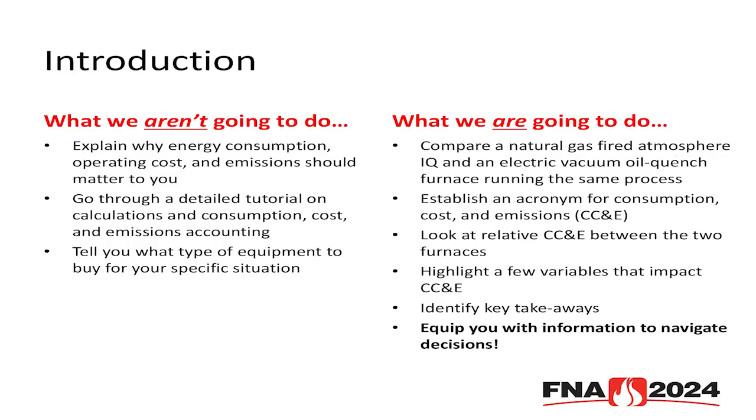So what are we going to do? We're going to go through a case study comparison between a natural gas-fired IQ furnace and an electric vacuum oil quench, running the same workload, the same process, and we'll be going over their results for energy and utility consumption, the operating costs for that cycle for each piece of equipment, and the carbon emissions.

We'll also look at just a couple variables that can change those results. There's a lot of variables that can have an impact, but we'll highlight a couple, and then we'll summarize takeaways at the end. So our objective here is to equip you with information and gain some familiarity on the data behind what's actually going on in this comparison.

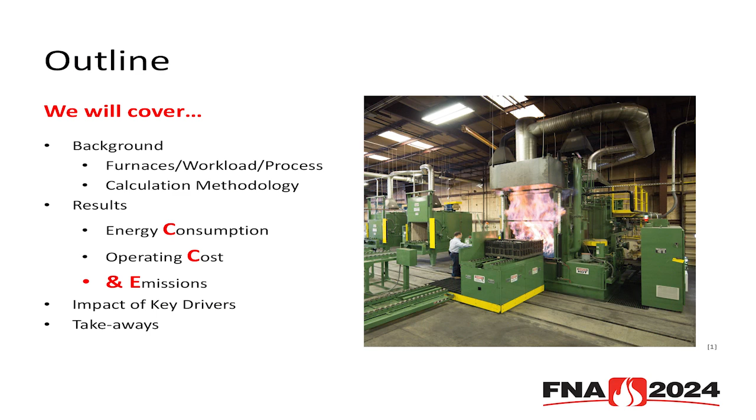So we'll run through a background, going over the equipment, the workload, the process, a brief overview of the calculation methodology behind it, go through the results for energy consumption, operating cost, and carbon emissions. We'll talk about some of the key drivers and summarize the takeaways.

The Atmosphere IQ uses indirect fired recuperated burners for its heat source, while the vacuum uses SCR fired electric heating elements. So that's one of the main key differences.

Another important distinction is that the Atmosphere furnace has 12 inches of ceramic insulation, whereas the vacuum furnace just has 2 inches of graphite felt. That's pretty typical for the difference between vacuum and atmosphere equipment, just because less insulation is used to preserve the quality of the atmosphere and maintain a good pump down time. But we'll see how that difference plays into the results significantly.

One other difference is the way each furnace produces its atmosphere. The IQ on the left uses endothermic gas for its protective processing environment, measured at 750 CFH, whereas the vacuum furnace uses pumps to remove the atmosphere, in this case a roughing pump and a booster pump. So two different methods of accomplishing the same thing, but again, one of the key distinctions that'll show up and make a difference in the comparison.

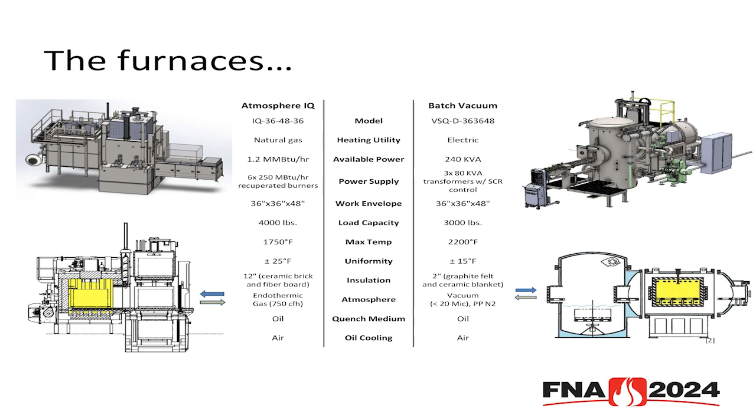There are a couple other minor differences, like the total workload capacity and max operating temp between the two furnaces. But because we're looking at the same workload in each, operating the same thermal cycle and same temperatures, that's going to come out in the wash since we're running them the same way and using the same capacity.

Speaking of the workload, we'll be looking at a basic neutral hardening process. The workload will be 2,500 pounds of 4140 steel, with an hour 45-minute ramp rate, corresponding to about 15 degrees a minute, a really typical ramp rate, going up to 1550 and holding for 2 hours, followed by an oil quench.

We picked this cycle just to have a very clean baseline for comparison. Obviously there could be a lot of different permutations for the thermal profile with different preheat temperatures, soak times, ramp rates, et cetera, but we wanted to go with something middle of the road to get an idea of how they stack up.

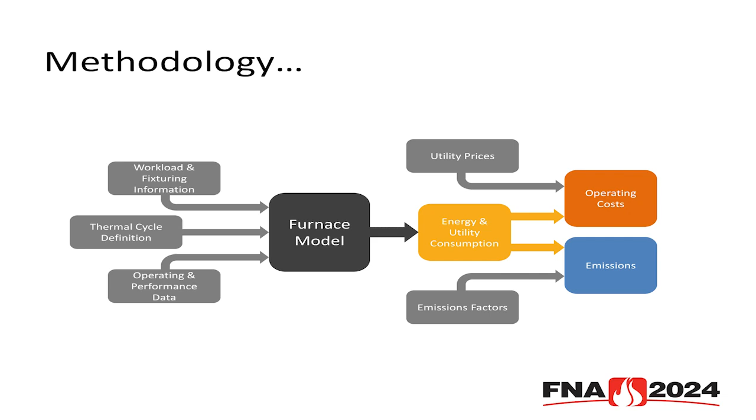Things like power consumption for pumps, et cetera. We're feeding all that into a furnace model to come up with the energy and utility consumption for this particular cycle. Once we have that energy consumption, we're taking utility prices and combining it with that to come up with the operating cost for the cycle. And on the bottom, we're taking emissions factors and adding them into the energy values to come up with the equivalent carbon emissions.

I know I said we're not going to get too far into the weeds, but I did want to go through some basic carbon accounting terminology for anyone who's not as familiar with that. There's a pretty common misconception that eliminating on-site combustion and moving toward electrification can just eliminate carbon emissions in general. That might be the case if you're contracting specifically for renewable energy, but in most cases you're required to account for all the emissions associated with your process.

That covers things like the direct emissions from burning fossil fuels on site, which fall under Scope 1. It also covers any emissions generated as part of generating the electricity you consume on site, so fossil fuel fired power plants also fall under that, and that would be under Scope 2. And it covers anything associated with the delivery of products used in your process, which fall under Scope 3.

An example of that would be delivering finished goods or delivery of nitrogen if you have compressed gas or liquid nitrogen -- so just delivery costs, and that's going to vary some depending on your location.

So the nice thing about that is we can take emissions factors and use them to translate those different utility consumption values directly to equivalent CO2 for a comparison. Some of those values are fairly fixed, like the amount of CO2 that's generated when you burn a fixed amount of fossil fuels in a burner. That's a pretty fixed value, but some of them will change, like I mentioned, the nitrogen.

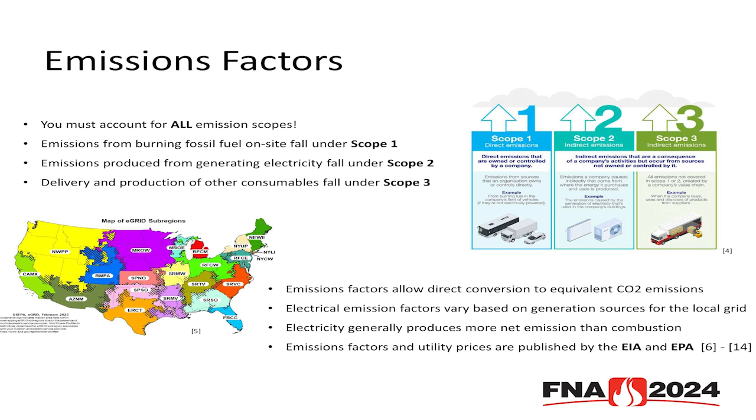Depending on your nitrogen infrastructure, you could have, if you're delivering compressed gas versus delivering cryogenic liquid or generating on-site, depending on your storage capabilities, distance to suppliers, all those things can have an impact on what the emissions factor would be for that. So there's some variation there, and very importantly, the electric emission factors can change as well, depending on the sources for generation for that region of the grid. But those emissions factors and utility prices are published by the EIA and the EPA, which gives us a nice baseline to reference published data for what those can end up being.

So we'll dive right into the results. Simple slide, a lot of work going in behind it. But this is kind of an overview, and there's a couple important observations that we'll unpack right out the gate. So the first thing we see is that the atmosphere IQ is consuming about 2,300 MBTU of energy for the cycle, whereas the vacuum furnace is right around 1,500. So that's about a 60% increase in energy consumption for the IQ furnace, which is big. And the next couple slides will dive into more of why that is.

But despite consuming substantially less energy, the vacuum furnace at $35 a cycle is around twice as expensive to operate as the IQ at $17. So that's primarily due to the fact that electricity is just a more expensive energy source for firing the furnace. So despite that difference in consumption, the vacuum furnace ends up being more expensive to operate.

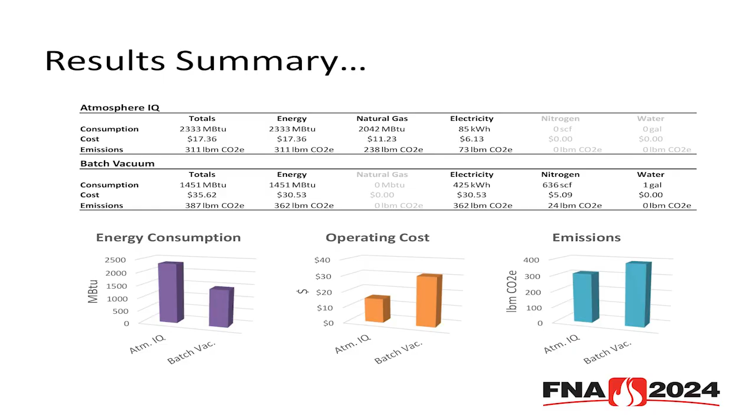And there's a similar story with emissions, where the emissions factors for electricity tend to be higher as a result of all the inefficiencies along the supply chain of delivering that, because again, unless it's renewable to start with, you're generating it, transmitting it, and for thermal processes, in the end, that tends to have a higher carbon impact than just burning those fossil fuels directly on site.

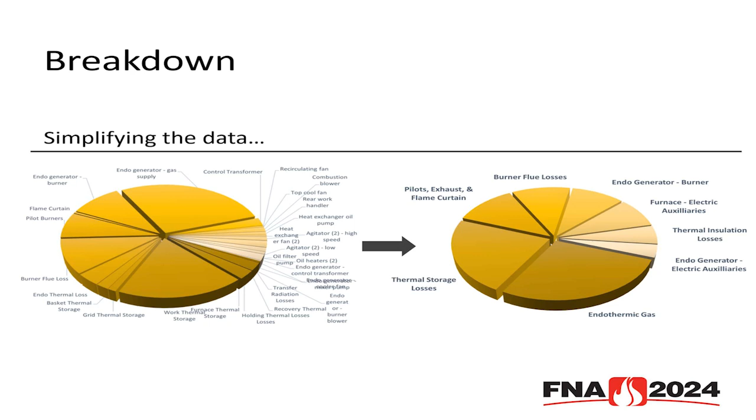So I threw this slide in just to give an idea of all the pieces that are coming into these models. It's a little bit overwhelming with all the lines there. So what we wanted to do was distill this down, make it a little bit easier to process, simplify the data. So we took different things and distilled them down into categories, so you can see things like the thermal storage for the baskets, grid, work, and the furnace are all combined into just one piece for total thermal storage, just to simplify what we're looking at. So this particular pie chart is for the energy on the IQ furnace, but we did the same thing with each of the charts.

So starting off with energy, one of the first things to point out is with the thermal storage losses, those are essentially equivalent for each furnace because we're running the same workload, same material, same mass. They show up as different percentages just because the totals for each furnace are different, with the atmosphere IQ being higher, but those numbers are essentially equivalent.

And then moving on to the thermal insulation losses, which if you're like me, that's one of the first things you think of when it comes to energy consumption in thermal processing equipment. That makes up 30% of the vacuum, and it's only 5% of the IQ, which isn't terribly unexpected because if you'll recall, that IQ furnace has significantly more insulation, but it really shows up here in the thermal losses and how much more efficient the IQ is.

But that kind of begs the question: if the thermal storage is essentially the same between the two pieces of equipment, and the IQ furnace is a lot more efficient as far as thermal losses, then why is the IQ consuming more energy? And this was one of the more eye-opening pieces for me going through this, was just to see that the endothermic gas is such a huge contributor to the IQ furnace. So the gas flow itself for conversion is 28%, but that doesn't even account for the generator burner, the controls for it, and the electric auxiliary.

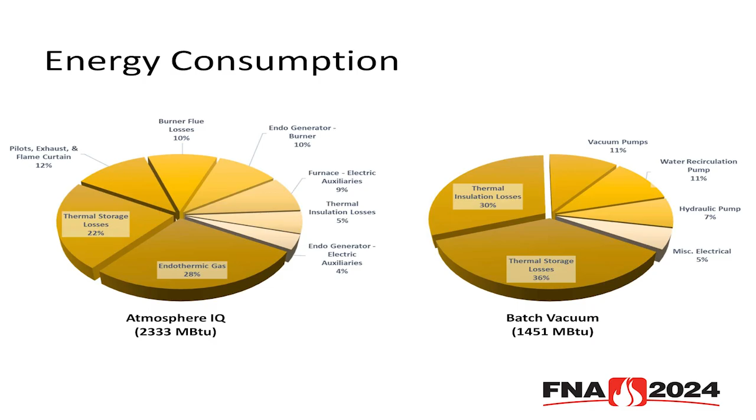So it ends up being about 42% of the energy consumption from the IQ is coming from the atmosphere generation. Whereas with the vacuum furnace, with those two pumps running, we're looking at about 11% of the total consumption. So even though the vacuum is not more thermally efficient, it's a lot more efficient at generating a protective atmosphere.

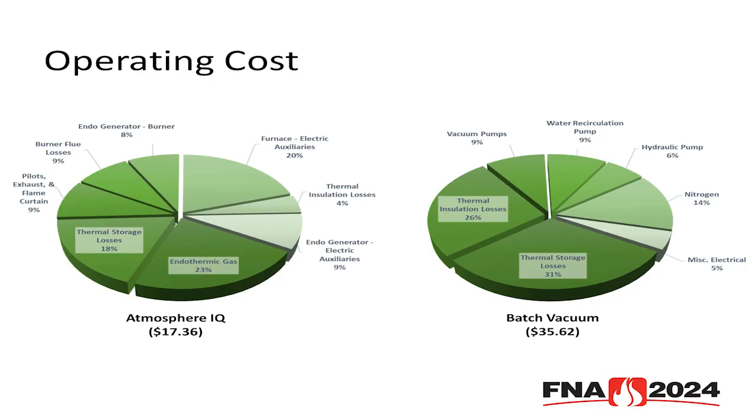With operating cost, it's a similar breakdown, because if you'll recall from that information flow diagram, it's based on energy and just the utility costs are applied. So we have the introduction of a couple other things that weren't included in energy consumption, like nitrogen gas usage. But the big thing here is that anything that's electric basically gets inflated for both pieces of equipment. You can see that really clearly with the furnace auxiliaries on the IQ, which only made up 9% of the energy consumption contribution, but make up a full 20% of the cost. And the same is true with the vacuum furnace, where you really see it blow up with all the thermal components, losses, storage, and ultimately landing the vacuum furnace at that higher price point to operate.

The carbon emissions is a very similar breakdown, same story. It's not quite as extreme because the relative emissions factor of electric to gas is not as dramatic as the price point between those two. But we have a similar breakdown, with again the vacuum furnace generating slightly more carbon emissions, but not nearly as extreme as the price difference. So this is about 25% more carbon generated from this cycle in the vacuum furnace.

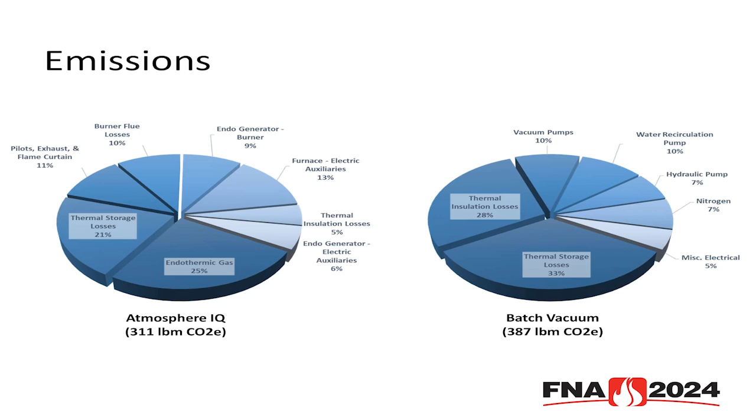So I know we kind of just mentioned that there's a lot of variables that go into this that can change it, and we're not going to go through this whole slide. But it's just to illustrate all the things that are in the background that could change the outcome that we're looking at and the results that we just looked at. So you can think things like if we had a longer hold time, if we changed the mass of the work that we're processing, if we sized our pumps a little bit differently or had a different endothermic gas flow.

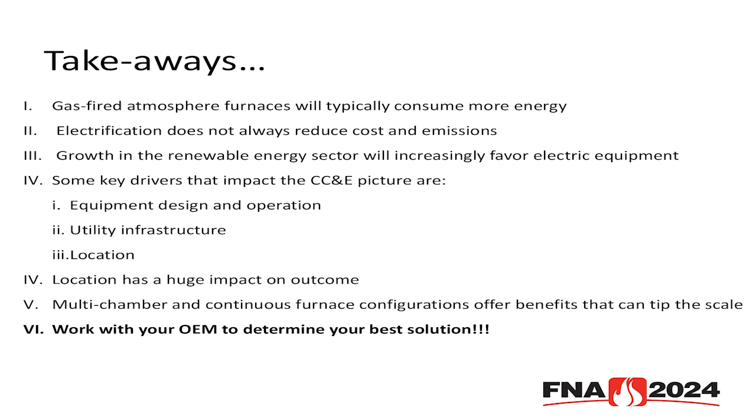So does anyone have any questions for Brian?

Definitely appreciate choosing that neutral hardening process for doing apples to apples comparison on these. I was wondering though if you might have a good feel on how they might compare when looking at something like gas carburizing versus low pressure carburizing - the generation and transport of your natural gas versus acetylene - and also taking into consideration things like shorter cycle time since you can carburize at a higher temperature in your vacuum furnaces. I don't.

We've talked about looking at it. We'd like to get a feel for, especially with carburizing, how that stacks up based on the changes with cycle time, as well as just the gas supply infrastructure. So hopefully that's coming.

That's a great question. I had the same one, but I was also wondering about the Vermont energy costs and emissions energy. I would expect it to be the opposite. So the cost flips - I haven't dived into exactly what's driving those low emissions factors for electricity in Vermont, but I believe it's because they've really focused on a lot of renewable generation sources.

California is another state that's similar. You could probably tell by the color of a state on a political map where it's going to fall with the emissions factors - the emissions would be the same generation of energy as whatever energy they have available for the state.